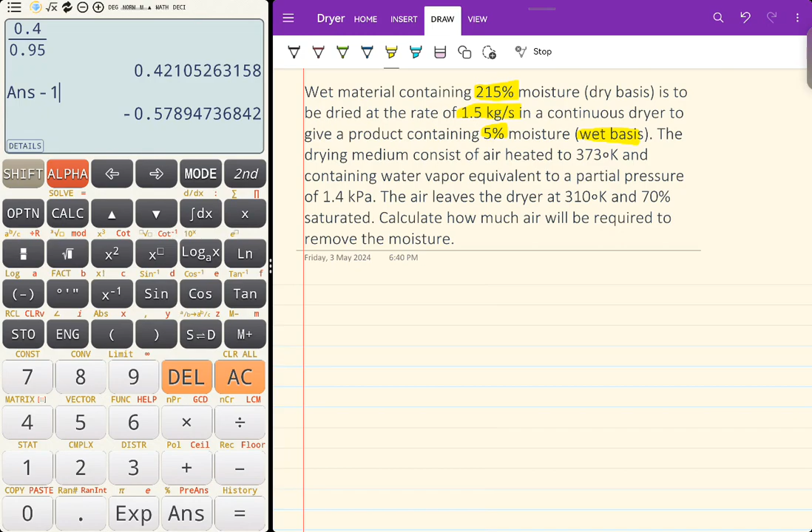Basahin muna natin. A wet material containing 215% moisture, so very wet na siya, is to be dried at a rate of 1.5 kilograms every second, in a continuous dryer to give a product containing 5% moisture, wet basis. Later, papaalala ko sa inyo yung wet basis tsaka dry basis niyan.

The drying medium consists of air heated at 373 kelvin. So, 373 kelvin minus 273, that is 100 degrees Celsius.

Containing water vapor equivalent to partial pressure of 1.4 kPa. Partial pressure is PV, PV yan.

Now, the air leaves the dryer at 310 K. So 310 minus 273, and that is 37 degrees Celsius. And 70% saturated, so RH is 70%.

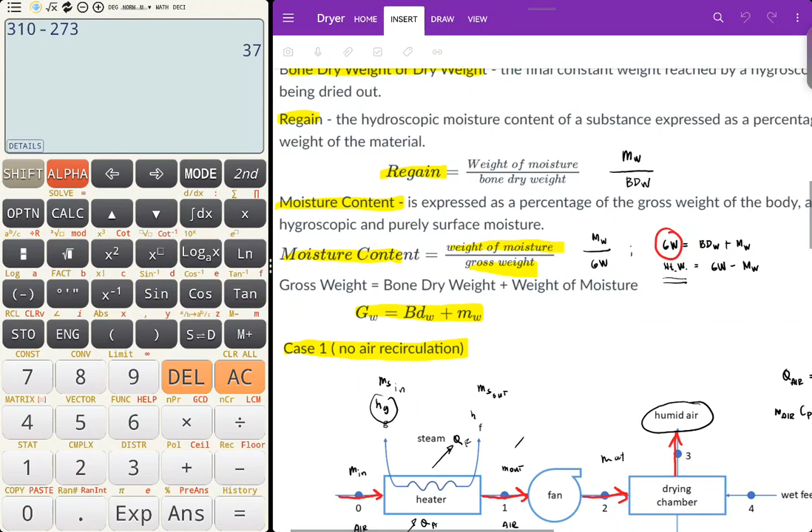Now, how much air will be required to remove the moisture? Paalala natin yung dryer calculations. Kapag wet basis, ba yung nilagay ko dito?

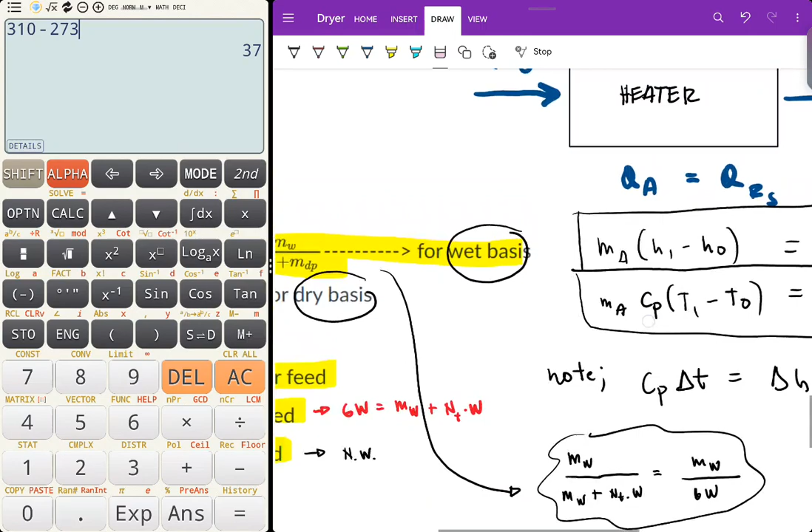For wet basis, kukunin mo lang, simply, yung mass ng water or the moisture na tinanggal mo, divided by yung mass ng water plus yung dry product. Ibig sabihin, that is the gross weight. Nilagay ko yan, gross weight. Mass ng moisture na tinanggal mo or mass of the water that is taken out of the product divided by gross weight. Ano ba yung gross weight? In simple words, yung gross weight mo is yung mass ng moisture plus the net weight.

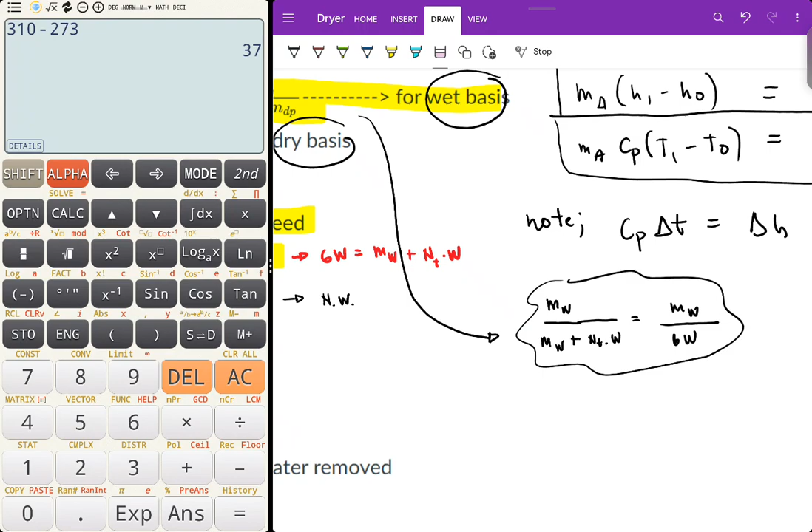Not necessarily wala ng moisture yun. Yun na lang yung natanggalan mo ng moisture. Pero may natitira pa ring weight yung moisture doon. Now, that is wet basis. Yan ang pinagkaiba niya. Yung net weight kasi meron pa ring moisture yun.

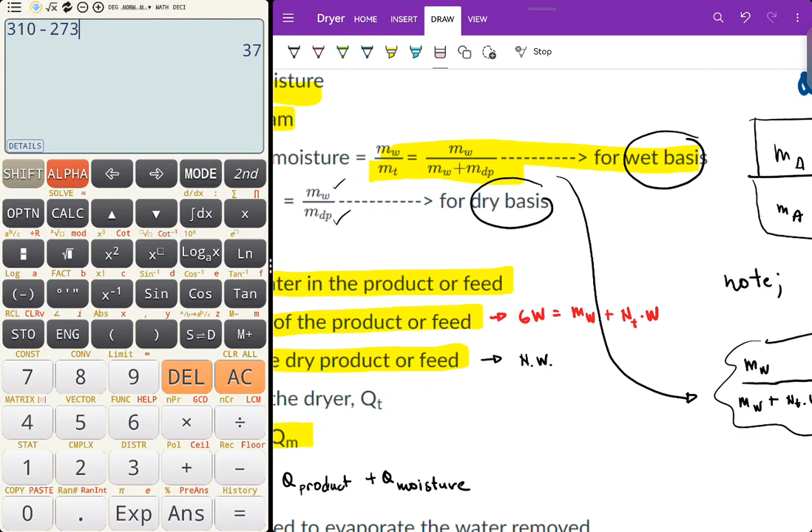Yung dry basis naman, kung pag-uusapan natin, dry basis is yung na-dry na product na, wala ka nang idadagdag na moisture. Wet and dry. Sa wet, meron ka pang moisture content sa baba, i-add mo dun sa dried product. Yung dry basis naman, wala ka nang idadagdag na moisture, sa dry product, as is dry product yun.

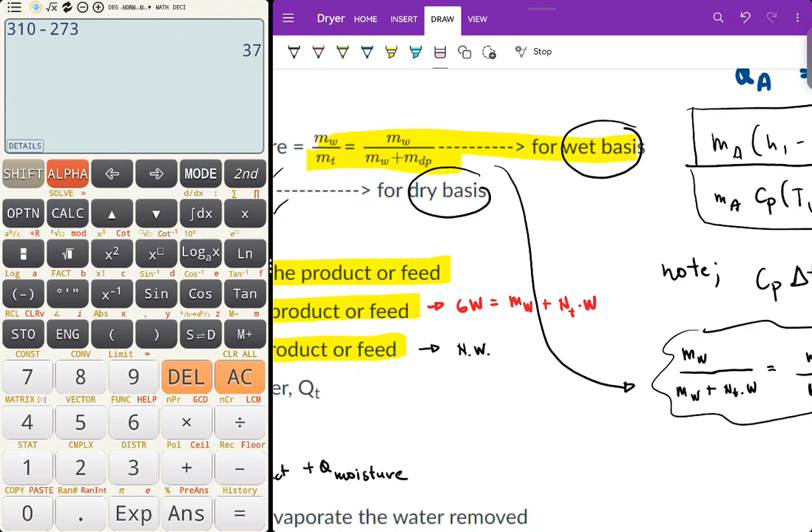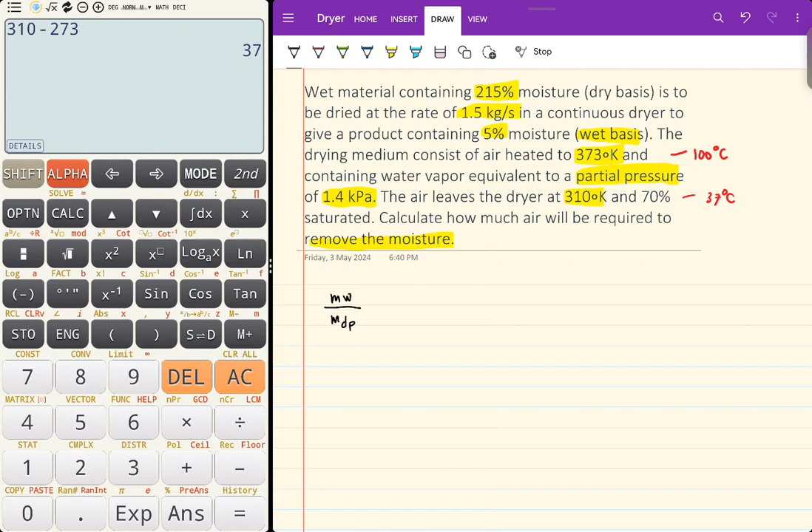Ang numerator mo is always the mass of the water removed. So for dry basis, mass of water divided by mass nung dried product. Ibig sabihin, that is the dry basis. So this is 2.15.

Ayan yun. So meron pang binigay sa'yo dito, continuous dryer to give a product containing moisture. I-drawing natin yung part na ito, in drying chamber, papasok yan as

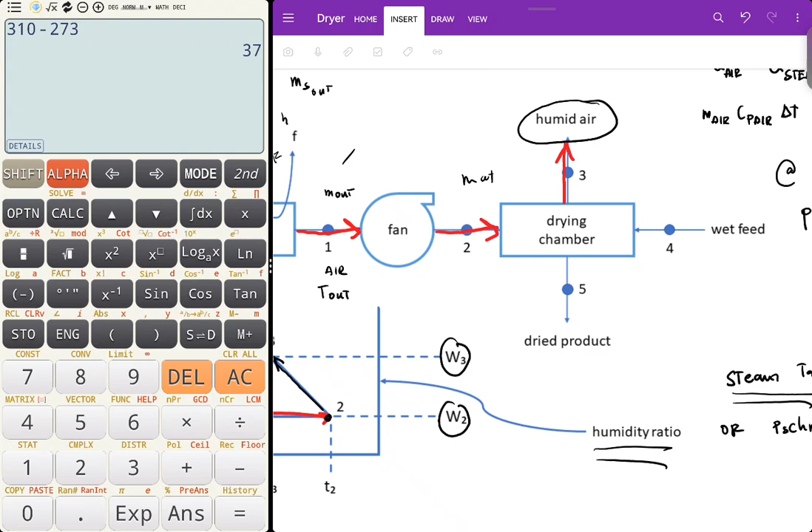wet feed, tapos dried product. Meron kang air. Dito yung air, tapos humid air, nalalabas siya. Hot air yan, hot. Tapos dito is cold na to.

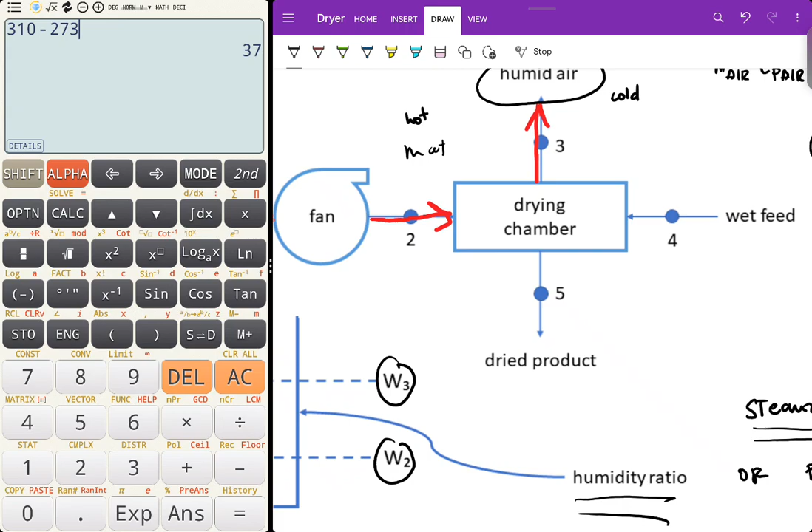So i-drawing natin din siya, para mas maintindihan mo siya. This is the drying chamber, lalabas as air. Parehas natin yung kulay, this is air. Ito yung air, this is dry air.

So ito naman yung wet product. Ipapasok mo dito, ilalabas na dry product. Wet feed, ito yung dry feed. Ganyan sa drying chamber.

Now yung binigay sa'yo dito, palagay natin this is 3, 4, 5, 6. Ganyan na lang yung notation natin. So M4 is equal to 1.5 kilograms per second.

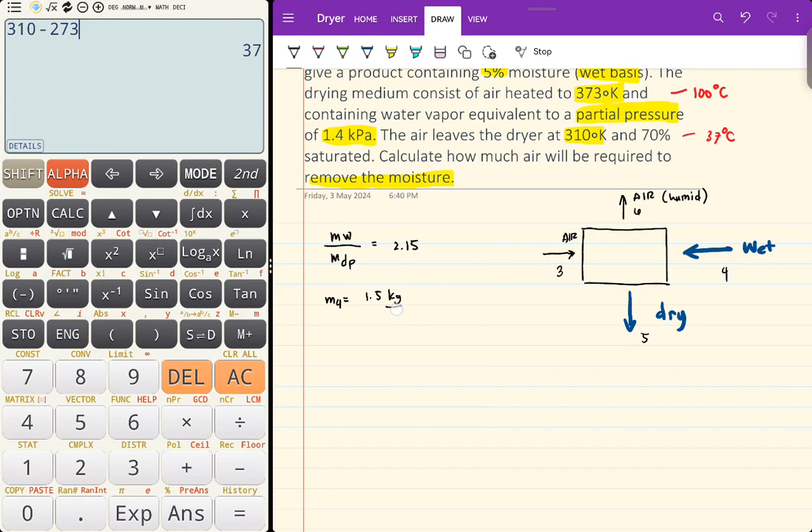Now, for the moisture of the product, for wet basis, percent moisture, for the dry product, that is 5%, wet basis to. Yan, for wet basis. So temperature 1, temperature 2.

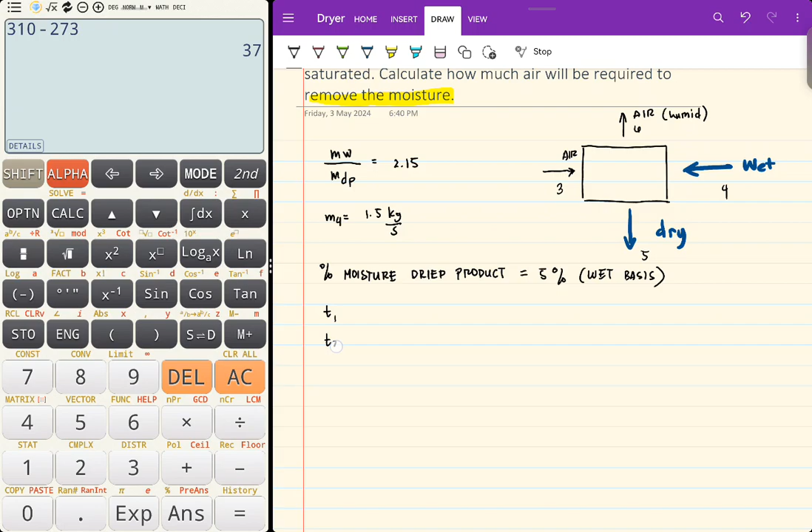Ano yung temperature 1 natin? So the air leaves the dryer at what? 310, so 37 degrees. Tapos, okay, T3, leaves the dryer. Yung notation nyo dito is, nandito yung 3. Kasi ito, 3, same lang to 3. Same lang yan, iniiba ko lang sa notation.

So T1, T1 ba talaga yan? T2. The drying medium consists of air heated to 373. Dito yan, T3, diba? Finan mo lang yan, T3, galing ng yung heating chamber. So T2 is equal to 100 degrees Celsius.

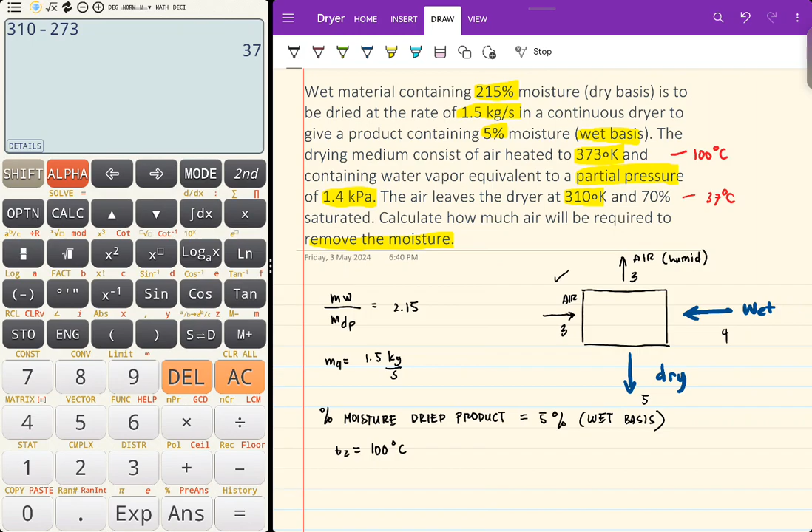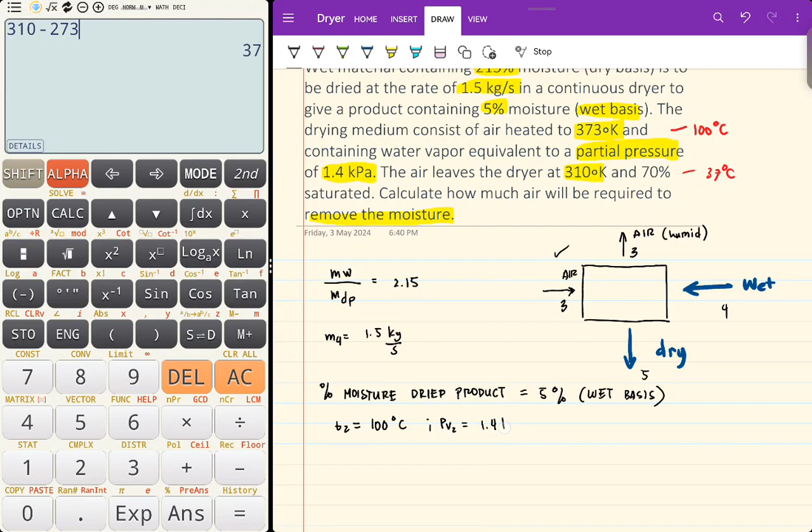Tapos meron kang partial vapor dyan na PV2 is equal to 1.4 kPa. Tapos meron kang T3 na 310K dito. Lumabas na daw yan, the air leaves the dryer. Dito, humid air, equal to 37 degrees Celsius. RH is equal to 70%.

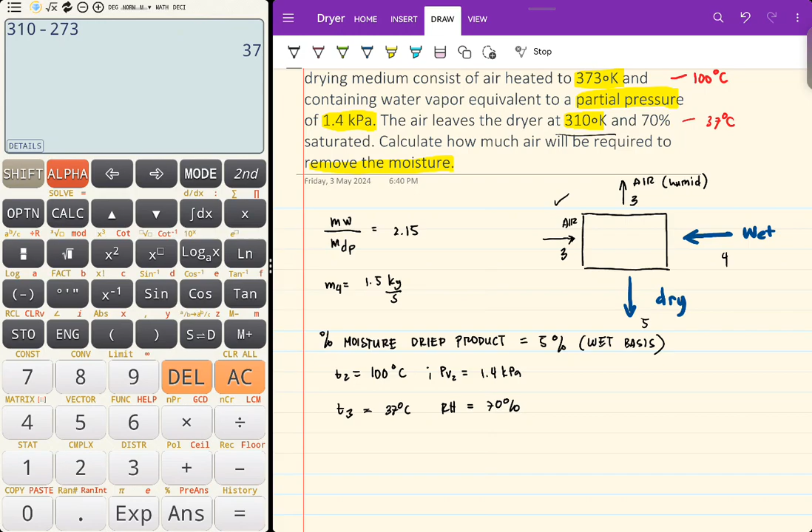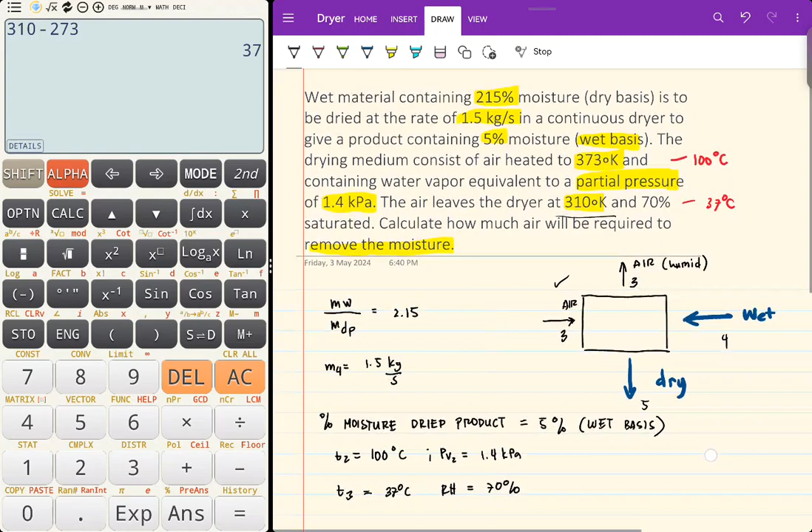Ang hinahanap mo dito is the mass of air. So you need to convert the percent moisture at feed to wet basis. Kasi ito, dry basis ang binigay sa'yo yung sa unahan. Nag-dry basis niya 215%. Uy!

Yung binigay sa'yo, convert muna natin siya. Paano mo i-convert to? So this is percent moisture wet basis equal to percent moisture dry basis. Pag ganyan, pag magkadikit yung dB dry bulb, so dry basis divide by 100 plus percent moisture dry basis.

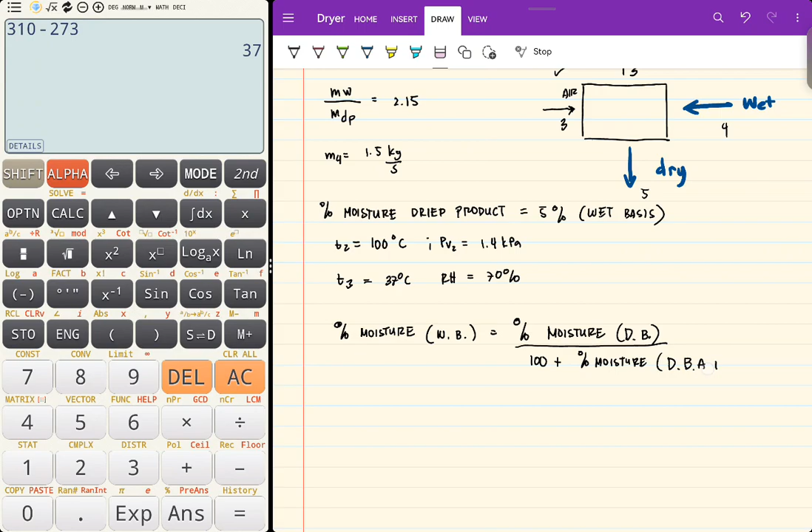Familiar ba sa inyo, halos pareho lang siya para maging wet basis. So for wet basis, that is 215 divide by 100 plus 215, times 100%. 215 divide by 315 times 100%. That is 68.254%.

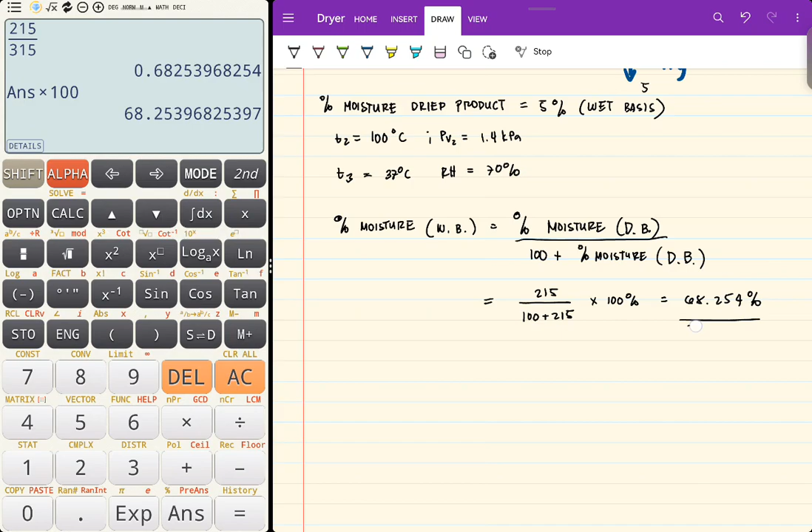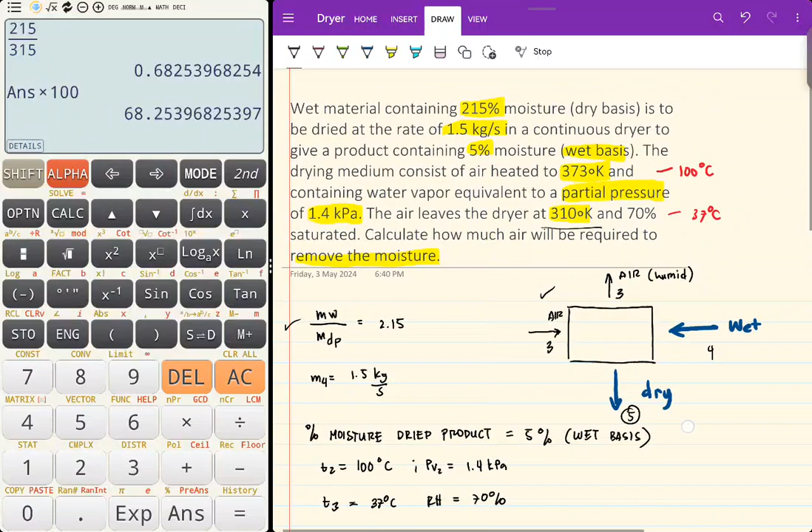Now, yung M5 dito, yung lalabas as dry product, that is yung rate of flow of dried product, mass of dry product. We know that yung bone dry weight in is equal to bone dry weight out. Dito lang muna tayo mag-focus. Bilugan nyo to.

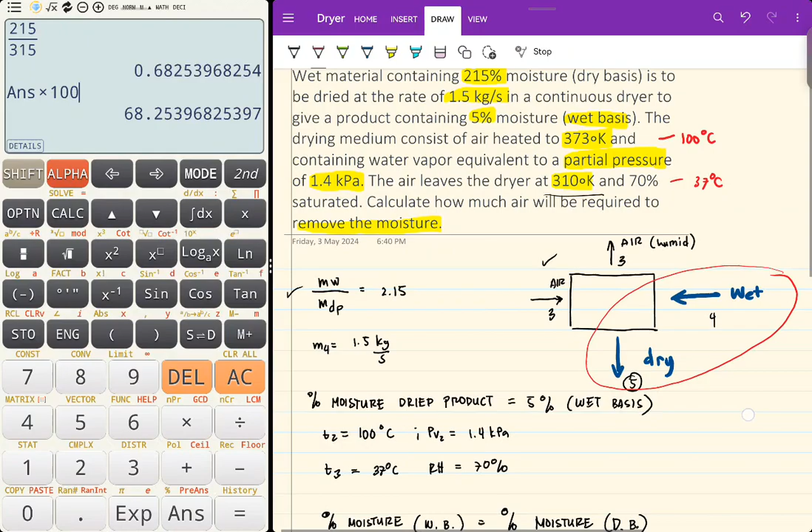Same lang yung bone dry dyan. Sabi dito, sa 4, meron kang 1.5 kilograms na merong wet basis na 68... 68.254. Okay? Tapos, dun sa lalabas, meron ka na lang 5% moisture content.

So, ano yung dry doon? Kung meron akong, ang pinag-uusapan natin dito yung dry product. So, yung naging dry product mo dito at 1.5 kg per second, is ito ba o yung isa? Tandaan nyo ito. So, meron akong 1.5 kg per second na feed.

Okay? Sa 1.5 na yon, ang basa is what? Wet basis, 68%. So, ibig sabihin, hindi yung 68% yung tuyo. So this is 1 minus 0.68254. Para hindi ka nalilito. 100% ng product, 68% ang basa. Yun yung tatanggalin mo.

Equal to, alam mo ba yung mass ni lalabas? So, M5. Ito kasi M4 to eh. Padali natin. This is M4, 1 minus yung percent moisture wet basis, equal to M5 times percent moisture wet basis.

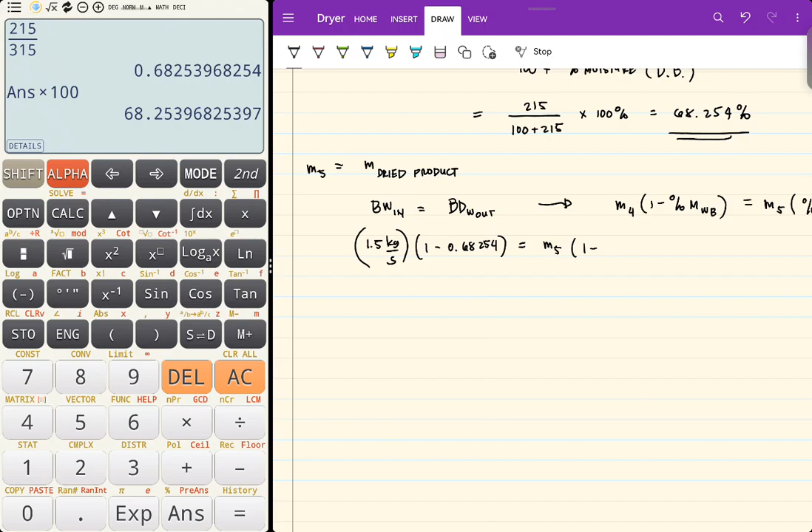Okay? So ang nangyari, this is 1 minus 0.05. Kasi ang nangyari dyan, 5% na yung moisture. Nakakalito lang talaga ang dryer. Kailangan mo lang analyze. Lagi naman tinatanggal tubig.

Okay? Huwag nyo gagamitin yung tubig. Tatanggalin nyo. So, M5 is equal to 1.5 times 1 minus 0.68254 divide by 0.95 kilogram every second. So, that is 1.5 times 1 minus 0.68254 divide by 0.95. So, ang nangyari dyan, 0.5013 kilograms per second.

Yan yung lumalabas na product dun sa dried part na. So, amount of moisture, tandaan nyo, yung amount ng moisture na natatanggap ng air is same lang sa amount ng moisture na ilalabas ng product. Amount moisture remove.

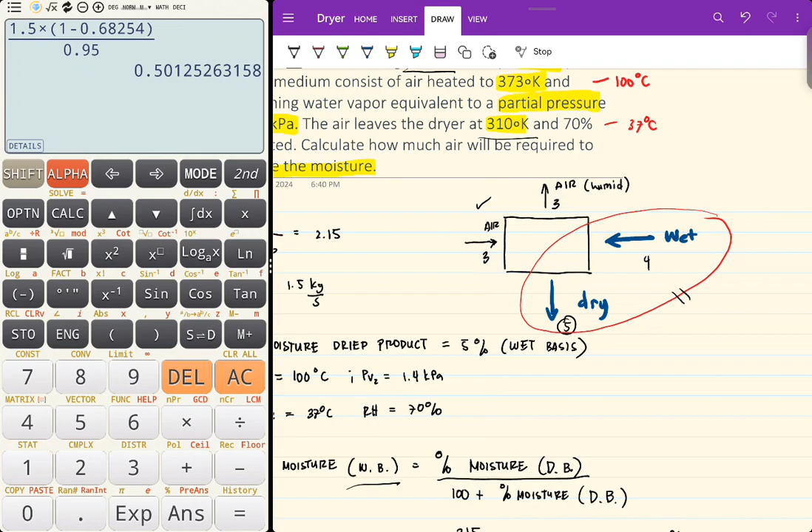This one, din tayo nagtanggal ng tubig. Kaya nga ihiwalay natin yan dito sa system eh. Yung tinanggal mong tubig dito, lumipat dun sa hangin. Ganun nangyari. So M4, 1.5 minus 0.5013 kilogram every second. So 1.5 minus 0.5013. This is 0.9987 kilogram every second.

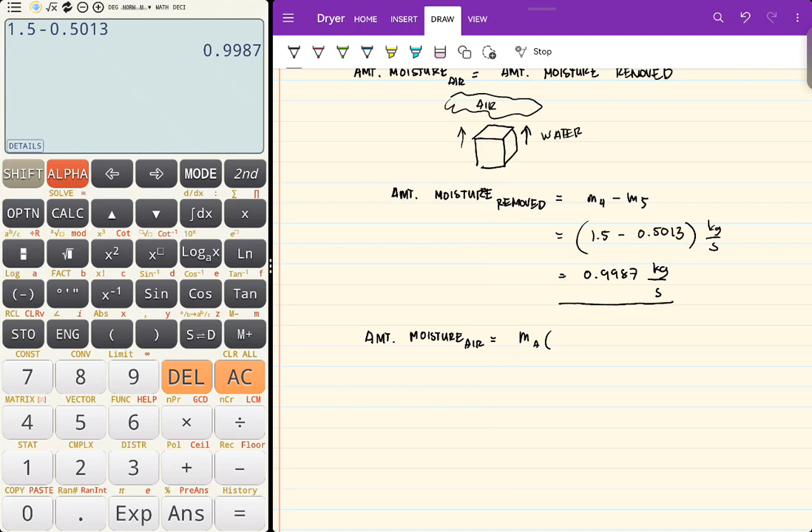Ayan yung moisture removed. Now, for the moisture that is absorbed by air, amount moisture air, this is equal to MA, tapos yung kanyang W3 minus W2. Saan makukuha itong W3 and W2? Recall natin, si W is equal to 0.622 PV over PT minus PV.

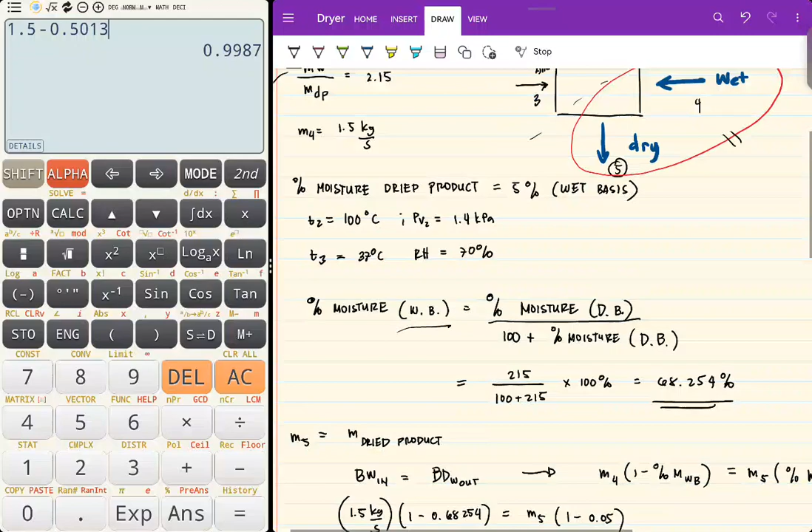Solve natin yung W2 tapos W3. So W2, solve mo na, omega 2, 0.622 yung PV at sa W2, PV at binigay ba dyan? Ayan, air leaves the dryer. Babalik eh.

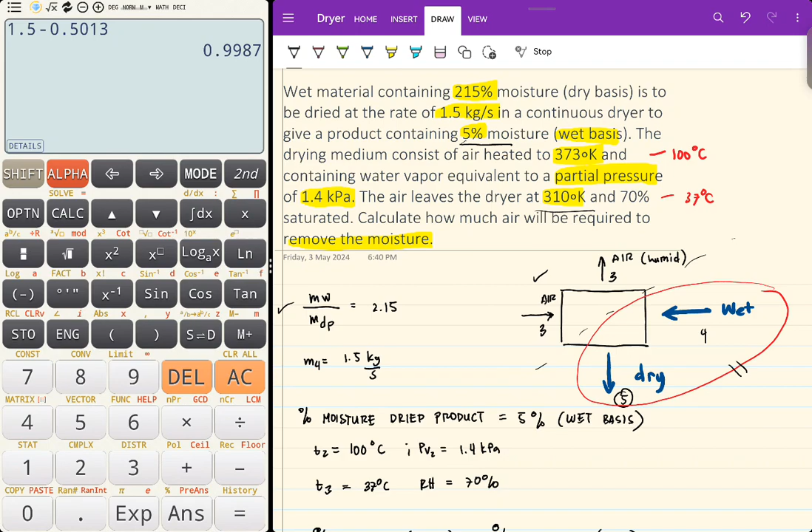So, this is binigay, ayun, 1.4. Bigyan na siya ng partial pressure. So, 1.4 kPa divide by 101.325 minus 1.4. Okay. 0.622 times 1.4, divide by 101.325 minus 1.4. That is 0.008715 kilogram vapor per kilogram air.

Tama? So W3, 0.622 PV over PT minus PV. Sir, sabi dito 70% saturated. RH. So, 37 degrees Celsius, temperature 3. RH is 70%.

Paano makuha yung PV? PV is equal to RH times pressure saturation at temperature 3. Sir, saan tayo pupunta? Steam table. Okay, for the steam tables, ready na yan. Tignan natin yung 37 degrees Celsius. Ano yung PV niya dito? The PV is 6.281. So, 37 degrees Celsius, 6.281 kPa.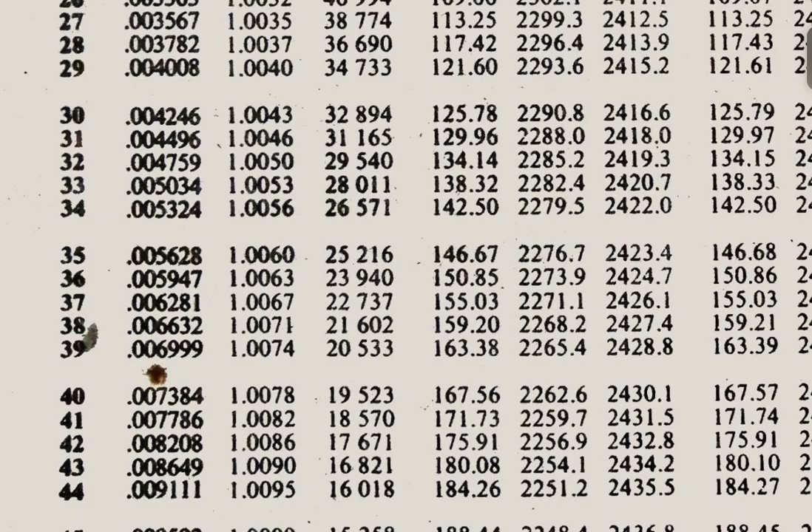Okay, getting back. This is 0.7 times 6.281 kPa. So, 0.7 times 6.281. The answer is 4.3967 kPa. Mahanap na natin si omega 3.

0.622 times 4.3967 divide by 101.325 minus 4.3967. So, 0.622 times 4.3967 divided by 101.325 minus 4.3967. 0.02821 kilogram vapor per kilogram air.

So, makuha na natin yung value. So, amount of moisture removed, MA, tapos W3 minus W2 equal to 0.9987 kilogram per second. So, MA is equal to 0.9987 kilogram per second.

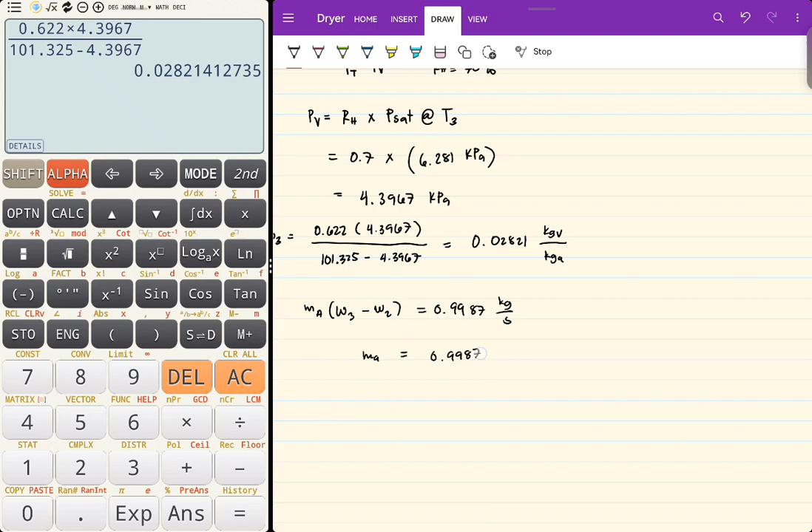Divide by 0.02821 minus 0.008715. This is 0.9987, divide by 0.02821 minus 0.008715. This is 51.2285 kilogram every second.

That is the amount of air. Okay, so yun yung sagot dyan. Pwede ka rin mag-psychrometric, pero mas prefer ko kasi steam table. Medyo sakto eh. Sa psychrometric kasi may discrepancy ka.